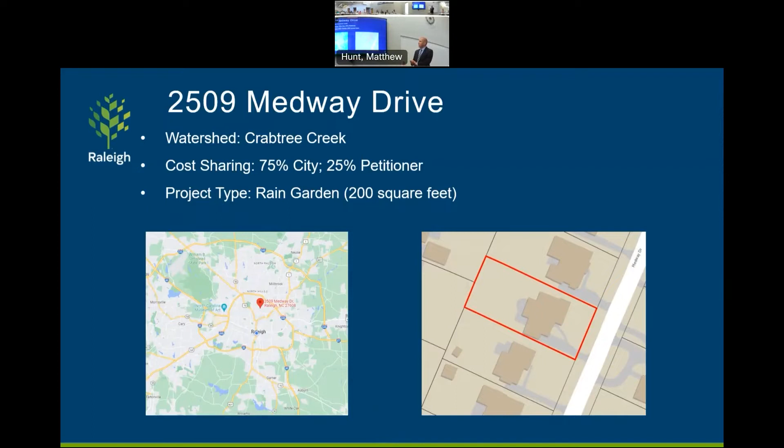The topography works out great. Everything kind of flows to the back corner. So pretty straightforward from a rain garden application.

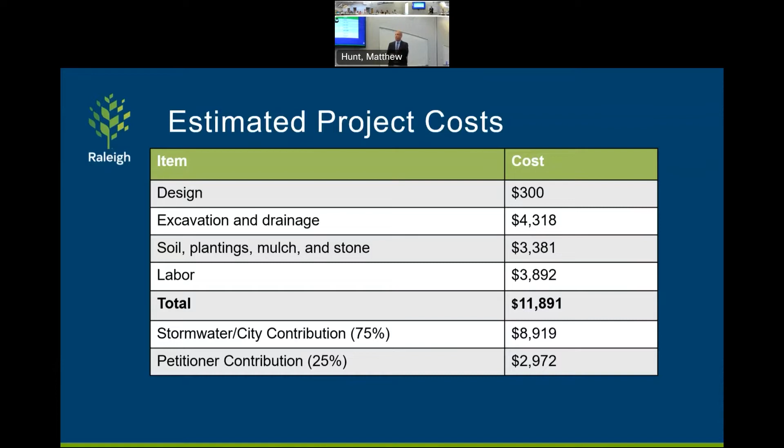See the breakdown in costs. Pretty general, pretty comparable to what we see on other rain gardens. We have a lot of data points from rain gardens - we've supported, I think, going on 90 of these over the last 12 years. As you'll see in the next slide, once we compare it to other rain gardens, it is spot on the mean, even with rising costs.

It's right on the mean for pollutant removal. Another slide shows the breakdown - total cost, the 75% that the city would be reimbursing, and then the applicant's portion that they would be obligated to pay.

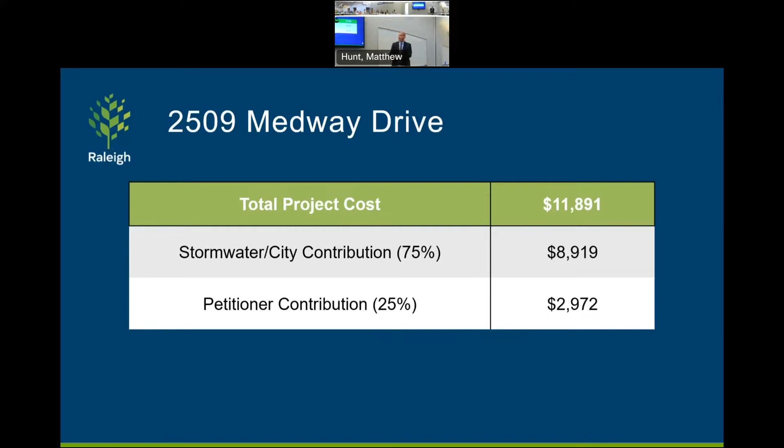This gets into the water quality considerations. The one thing we'll talk about a little bit in this one, but definitely in the next project, is the nitrogen removal cap. That was a recommendation from the commission last February 2021. It was a way to help not only compare different types of projects to the project being reviewed, but it also created a new acceptable cost for an approved project. In this case, the cap is $7,000 per pound of nitrogen removed.

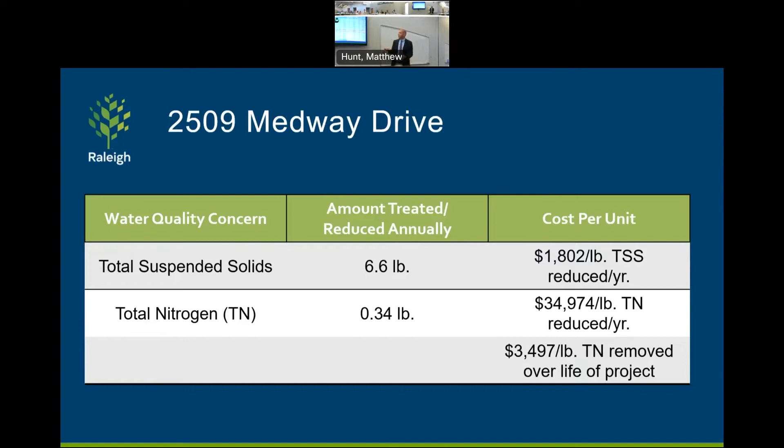This is showing this project is half of what the cap is. Just a kind of takeaway - this number is a function of total cost, the amount of impervious surface being treated, and the duration of the maintenance period. So what that really boils down to is a lot of impervious surface being treated, low cost, and a long maintenance period means a great metric. Those are the three things that combine. So this one, half the cap, comparable metric to other projects, as we'll see here - that's a truncated comparison against other rain garden projects.

It's dab in the middle. And you'll notice even for rain garden projects, which are usually slightly more cost effective than other project types, it's just slightly above the mean. So I just want to point that out. I wanted to walk through that nitrogen metric prior to moving on and see if y'all had any questions. I know we have some new members on the commission.

Is that the landowner decides whether it's a 5 or 10-year maintenance term? Good question. That is going to be based on how much they're being reimbursed. Per the policy updates in 2018, any request greater than $5,000 requires a 10-year maintenance period. Anything below that threshold is a 5-year maintenance period. So what you might have are projects right on the fence, maybe eligible for $5,100 in reimbursement. They'll voluntarily cap their reimbursement below that mark, have a shorter maintenance period, a streamlined process, and at the end of the day it's mutually beneficial for schedules and our goals. That is set per the policy, so anything the commission sees, generally speaking, will be a 10-year maintenance period. There is one or two exceptions, but not of value to go into detail with now.

Sure. Just a quick thing on the maintenance term - what happens if there is a home ownership change throughout that time? Is that linked to something in the contract? Very specific, but I was just interested. That's a good question, and we get that a lot. When me and Steven are standing in people's backyards, that's a question: what if I'm not living here in 5 years?

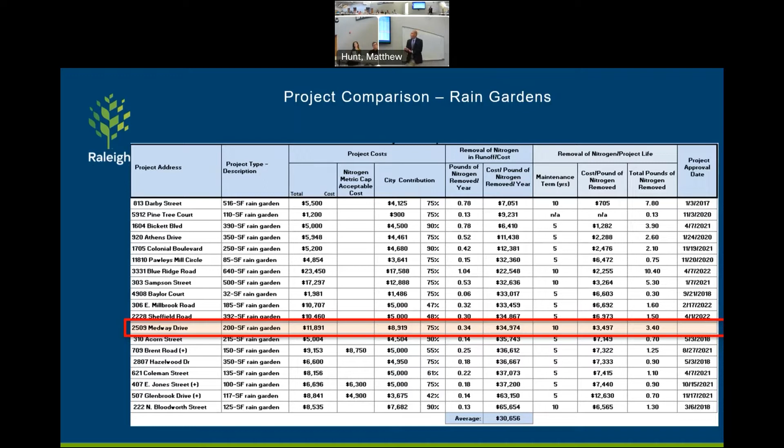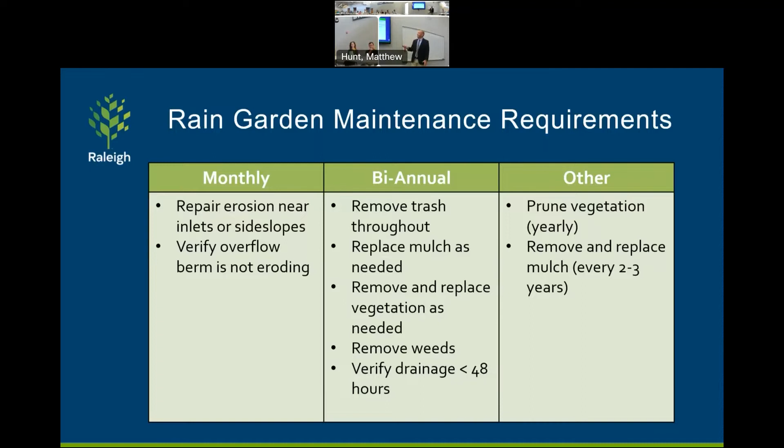All right, moving on, general maintenance rain garden, same slide y'all have seen if you were sitting in that chair since the beginning of presentations 90 times. So, any questions about this project?

Chair, would you like me to present each one? Yeah, all right, good. Put them together. All right, moving to the second one.

So this project is an underground cistern, and staff had two big concerns with this project when submitted. The first was the high metric - we just went into detail about that. It is a very high metric compared to all previously approved projects across all project types, and that's the first concern staff did share with the applicant. The second was the fact it's a difficult site - there's a tight backyard, and a lot of peripheral work will also need to be done, including a retaining wall to make this underground cistern fit in this footprint. So that was the feedback we provided back to the applicant.

They, in turn, made some small revisions to the application and then did their due diligence in an attempt to get multiple bids beyond the three. I'm presenting it as it's been submitted to staff, with the numbers that have been provided by the applicant.

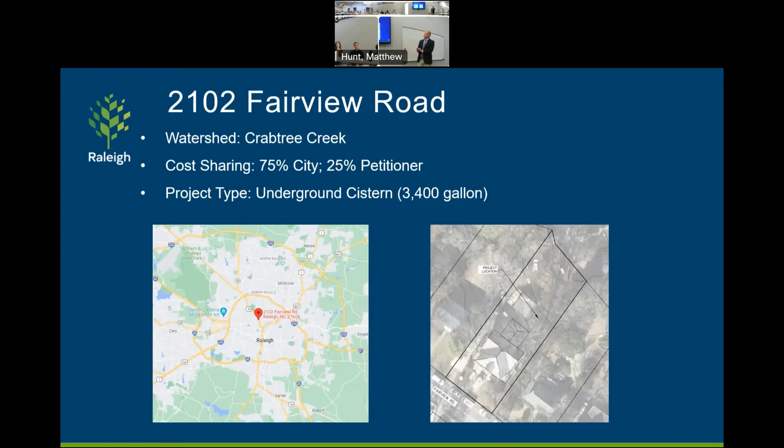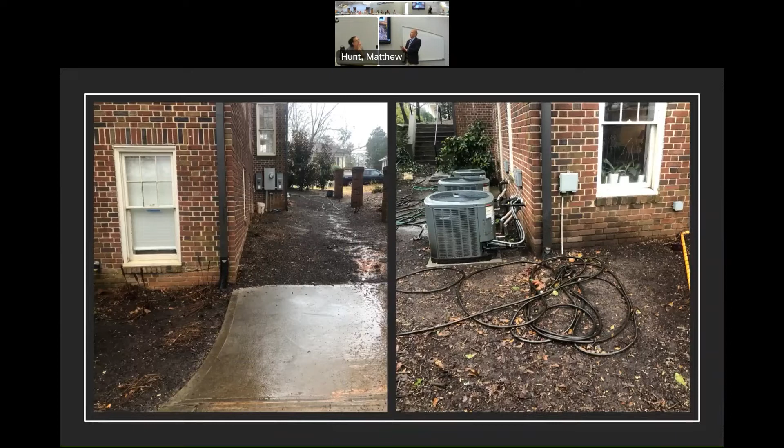I will say the designer has done well to mitigate a tough site to make a system work in the backyard. They're capturing all the runoff from their roof - rather large home - taking it along, burying it along the side of the house. Currently the downspouts are already buried, pointing back there, entering into a system as you can see over here. You can see they're coming down two inflow pipes into two separate systems that are connected with an equalizer pipe, and it has an overflow with a passive drawdown where the topography allows for that to discharge in the right rear corner of the lot, as you can see there.

I will say it's a very well thought out project with a lot of attention to detail on the design side.

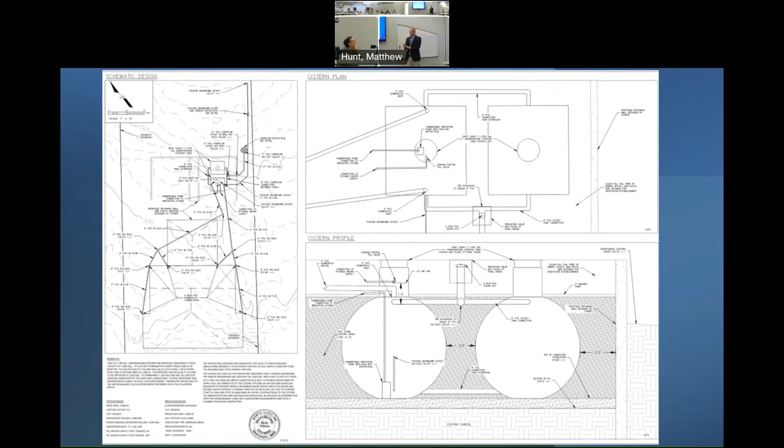Going on to the water quality metrics and considerations.

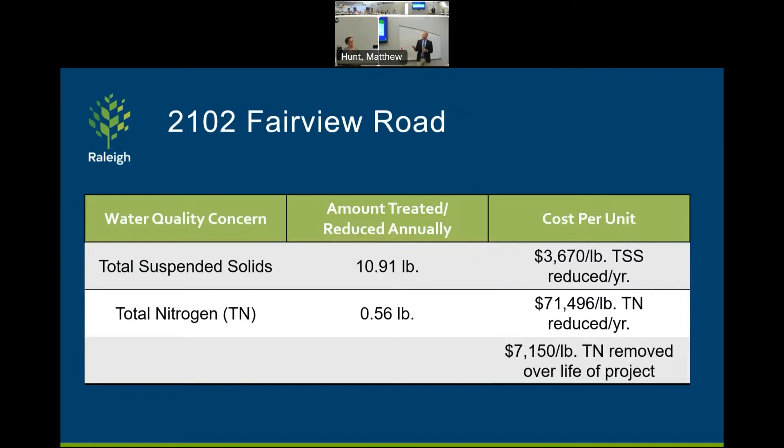As you'll see here, the cap was triggered on this one. The cap is once again $7,000 per pound of nitrogen removed. This is based on the applicant amount submitted, the total project cost submitted, which would trigger the cap. And so how that works is they submitted a total project cost of $40,000.

You work backwards from $7,000 per pound of nitrogen removed to develop a new project acceptable cost based on the cap, which is $39,200. And then the applicant is eligible for 75% reimbursement of that new acceptable cost.

And so after you go through that math exercise, and then you have your buddy check it, and then his buddy check it, you put it on the slide and show that it's not 75% anymore, it's 73%. And these numbers will add up to the total amount.

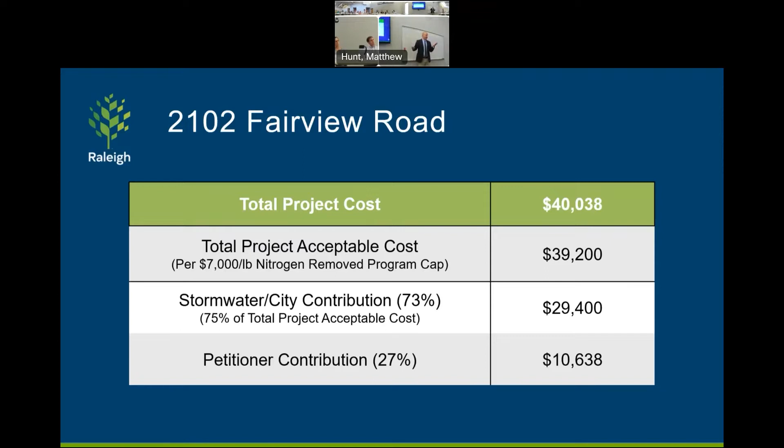So trying to see if there's parting words with the cap. The cap is triggered for high cost projects that do not treat a lot of impervious surface, or we find that it's also triggered on really small scale projects where there's a bottleneck where they can't get any cheaper on install, but they're not treating enough. So probably by design, it's catching both ends of that spectrum.

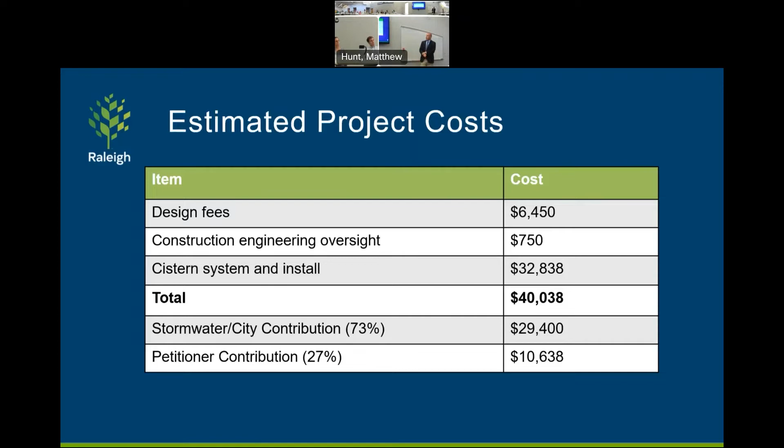Here is the breakdown in cost for this application. And you will see, as mentioned, it has a metric that is one of the highest the commission will have seen. For underground cisterns, this is just compared against underground cisterns. It's well above the average of underground systems and above that mean I was talking about across the program as you were reviewing the rain garden project.

Yes sir, are there rows below that? Not on this one. I only can use the truncated list, above ground cisterns and rain gardens. So it is the most. And even furthermore, if you were to pull off this long sheet and compare it against all the projects, there is, I believe, 1 or 2 green roof projects that might be higher, but there are no other projects on this sheet with a higher metric.

What's the maintenance requirement on that? Isn't that a little bit more intense? It is a little more intense. Our slide might simplify it, but it may involve a submersible pump. It may involve blowing out some piping that's not accessible underground. So they have a filtration setup, which is kind of a low maintenance choke point, so they can easily access their filtration box, for lack of a better word, at the inflow, and quickly get to that. But as long as that's maintained and their outlet pipes are maintained, it's not a whole lot different in maintenance. But yes, it is harder to get to, obviously, since it's underground. So very general, my answer is it would be more complex than an above ground system.

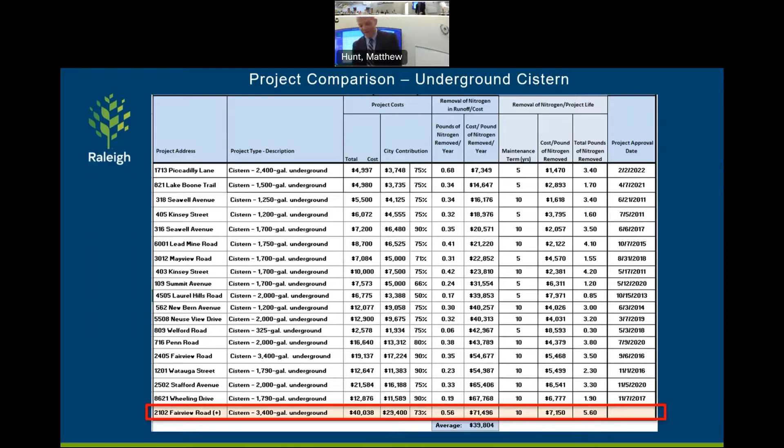With the proposed water quality volume, we require the water quality volume to capture the 1-inch rain event, and then the applicant can hold an equal amount on hand to use throughout the property. So the remaining gallons will be used for seasonal irrigation and landscaping.

Do you all do any sort of analysis to make sure they can actually use that amount? Well, like Mark was saying, it looked like a small lot and that's a lot of things. Yeah, very good point. The staff and the commission has struggled with that in the past.

How we've managed to move beyond that, and I think put it to rest, was the passive drawdown concept, where we're interested in the first inch of rain and want to provide a benefit to the applicant. We provide a cistern that'll handle 2 inches of rain, but we want that passive drawdown right in the middle, so they can't sit on that first inch and not use it all year. We always have that capacity recharging between rain events over 72 hours. At that point, it moved from more of an amenity to a water quality device that's mutually beneficial. That's generally speaking for cisterns.

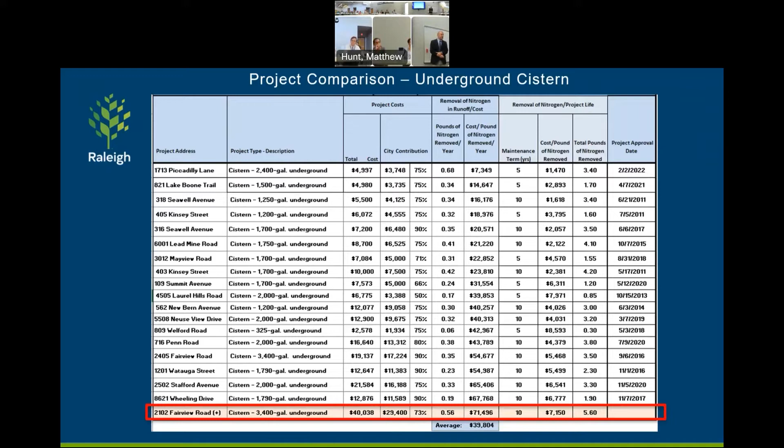So this is in a good spot, size-wise, for the property and the drainage that would collect in a 1-inch rain event. Is the size of the cistern appropriate? Oh yes, sir, the cistern is appropriately sized. It's a pretty large house. They are capturing over 3,000 square feet of runoff in a 1-inch rain event, so you get to what we would support, up to 2 times that size. So that side of it checks out, size-wise. That's the short answer.

Having experience as an underground cistern owner, you're gonna use up that water in the summer. You can burn it up pretty quickly. I'm not sure how big the yard is, but with winter you don't have to use much, so you're gonna have a lot of water they've gotta get rid of. Probably no use for it.

In your opinion, can you compare this to the other Fairview Road cistern that's the same size, that's almost $20,000 less? Is this new fancy design worth that extra money?

It's a valid question. I would maybe look at some of the dates. Some of them are older. That one was 2016. Trying to think of the 5508 Neuse View Drive one, that's relatively recent. Our standards really haven't changed, so it should be pretty comparable. I would argue the one factor we don't change is our standards, but what may change is the outside cost. I can't explain it other than what that math exercise generated and how it compares against other projects.

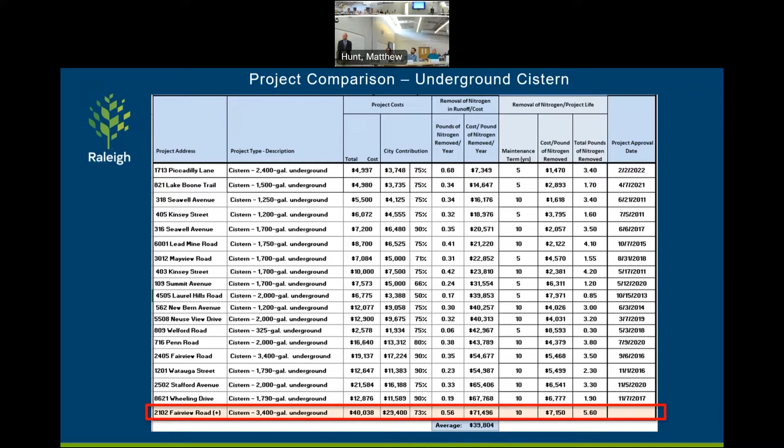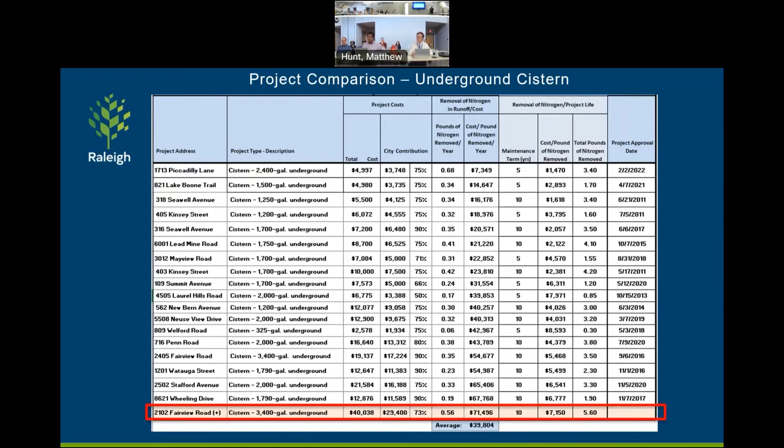All right, I will entertain a motion that we accept both proposals, the Medway and Fairview Road, as presented. Mark makes the motion, Earl seconds. All those in favor, raise your hand. Any opposition? Okay, one opposition. Motion passes.

That's Commissioner Calavera, just for the minutes, was in opposition. Do we normally delineate? Unless you wanted it for the record, Katie. I think we usually do. Okay, thank you all.

We did not receive the drainage assistance projects reviews in our information packet, so we did not have time to digest it. So I propose that we revisit this in September. With that being said, I had a question, without the package, but I wanted to first get reactions to that.

Also keeping in mind that we have representatives from Bramblewood Drive here just to be present to answer questions. I want to hear from the commissioners: do you agree with waiting until September when we get the packet and digest it, instead of seeing it for the first time here? Or can we see it for the first time here and proceed? I don't think it'd be appropriate to wait, but I've got one of the petitioners here. I would like to go ahead with the presentation, so any questions we can get to them too.

Okay, do you want to just skip Pool Road and go to Bramblewood? Let's do that, although I do have a question about Pool Road. I would say you have both of them lined up in order, Pool Road and the other. Just proceed with both presentations. My apologies to the commission, that was my oversight that the package wasn't in the material. So at this point, we'll receive the information, but we may not take action on it until we can deal with that.

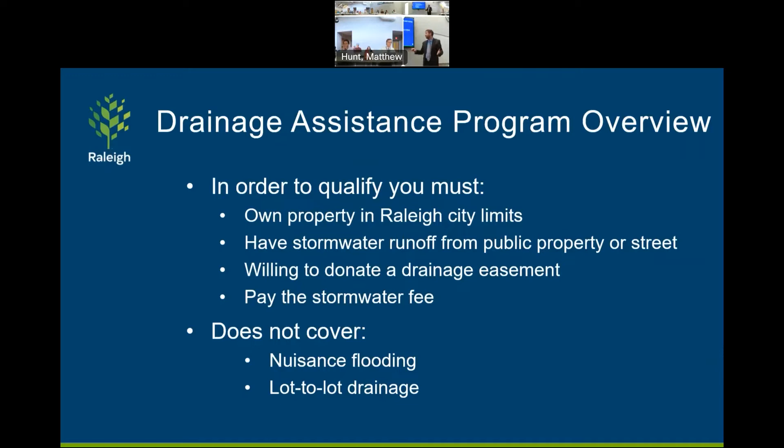We have $1.25 million in annual funding this fiscal year. That's what's allotted, not necessarily what gets spent in the fiscal year, as projects take time to design and construct before that money gets spent. These numbers I'll present are estimates. With that $1.25 million, we're anticipating about 8 projects per year. Keep in mind these are small projects, not larger CIP projects—they're generally smaller based projects with funding.

So the first project we'll talk about is Poole Road, a little bit east of downtown within the Beltline. Next we have Bramblewood Drive, a little bit north of the Beltline off of Freedom Road. This is actually a larger drainage systems project—we have 6 projects that are impacted by Poole Road.

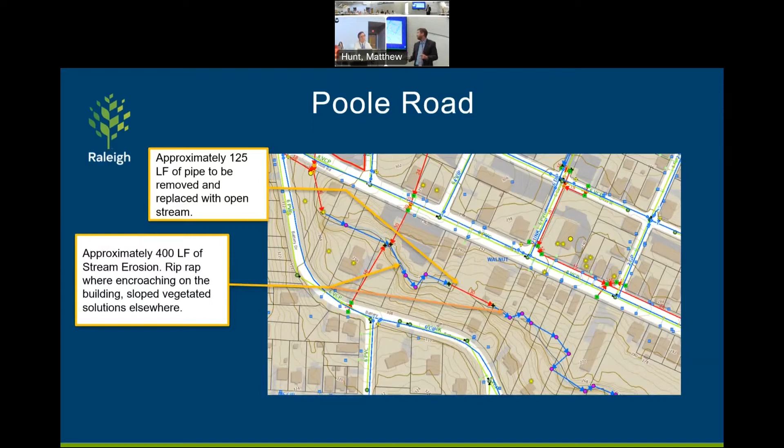One of the things I wanted to do is compare this project with another similar project. I picked the 1308 Poole Road, which is a little bit upstream, as I mentioned.

When we score these projects, there's about 50 different criteria that we rank, and we want to try and be as objective as possible. Within these 8 or 9 criteria, there are about 6 sub-criteria, so that's where you get about the 50 criteria that we go in and rank. Generally speaking, the numbers match, which is good. They're not going to be perfect or always 100% consistent across as many items as we do rank, but I was fairly encouraged by the scoring.

For the cost, we would do $30,000 for the engineering design cost, $200,000 for the construction, and a total project cost of $230,000. Yes, prices are going up, taking that into account, but also take into account that we'd like to partner bundle, as we put it, the design and construction with the Poole Road project, which was about 300 linear feet and cost $196,000. So you can see fairly comparable costs there.

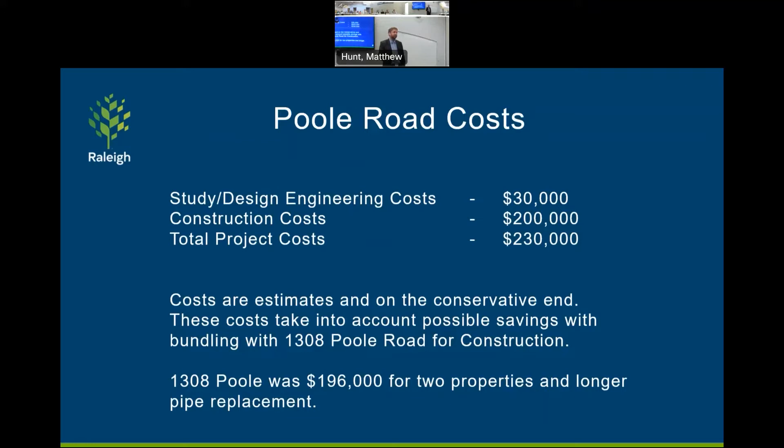That's tricky. So it's the 1308 project designed yet, or? It's in early design phases right now, so we would want to move that along. Again, not to pressure you guys, but just trying to. Maybe some economies of scale, yeah. Saving money since that's not implemented yet. Mobilization and stuff, that. You might go up a few slides, sorry, Chair.

Yeah, go. Yeah, I'm sorry, go back to the comparison. We're looking, you're saying 1504? Yeah, I mentioned one, I didn't want to stretch out all the addresses. Okay, because I had a question about the safety criticality score, which here is 50, but on one of your earlier slides it was listed as 90. So go back to the top. Right here. Apologize, I must have missed that. So which one is correct?

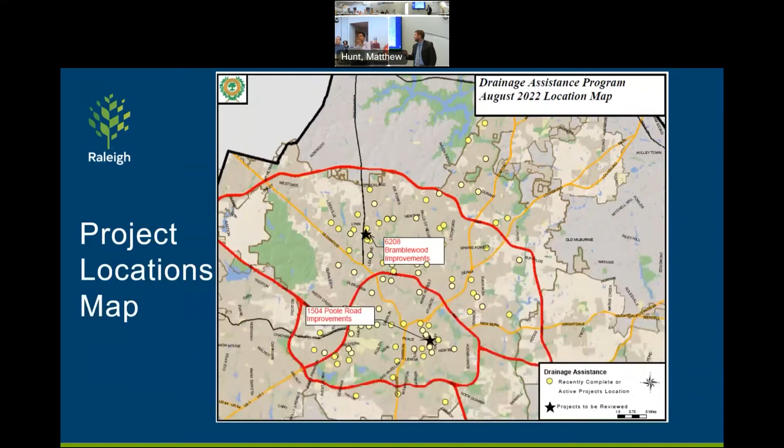It would probably be the 50 because of the length of the stream and the length of the impact, and that must have been an error on the Excel sheet.

So then my question is around safety. Not everything is hinged on safety, but if this is a 50 and there are several others that are higher, I guess why this one?

Well, because of the length of the project, not all the homes have erosion that's threatening the structure, but it would be good to go in and fix the whole thing rather than piecemeal it. For that one house, the safety score might be much higher, but if we were just looking at that, it's actually going to help solve part of the issue because downstream you have this pipe blockage.

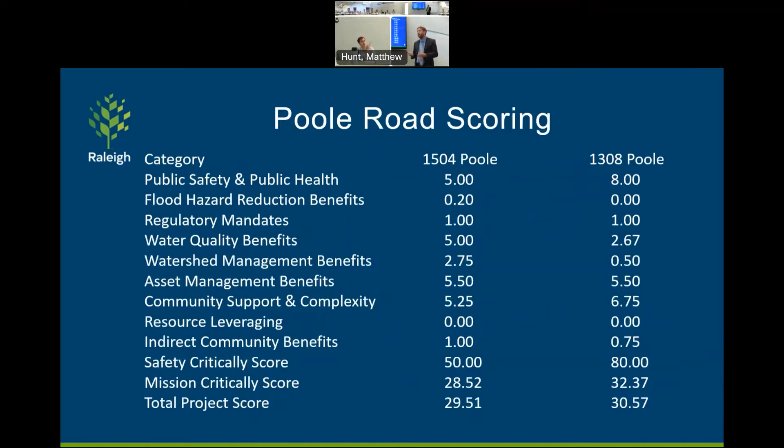I had the same questions you had, seeing the 90. So is there any chance that if you fix that 90, it'll bump this one down in prioritization? If we change that 50 to 90 in the Excel spreadsheet, it would bump it up actually, where it's listed as 90. Yes, it may bump it down.

Yeah, it'd be interesting to see where that would bring it in, right? It would be interesting to see it. Yeah, we can make sure we look at that. And the question I had even before you presented, this is close to Z5721,

which is the new proposed apartments a little bit north. I don't think that's the 1308 you mentioned here, is it? No. And that did not get a lot of community support, there's a lot of pushback there. So my question is, how does this project...

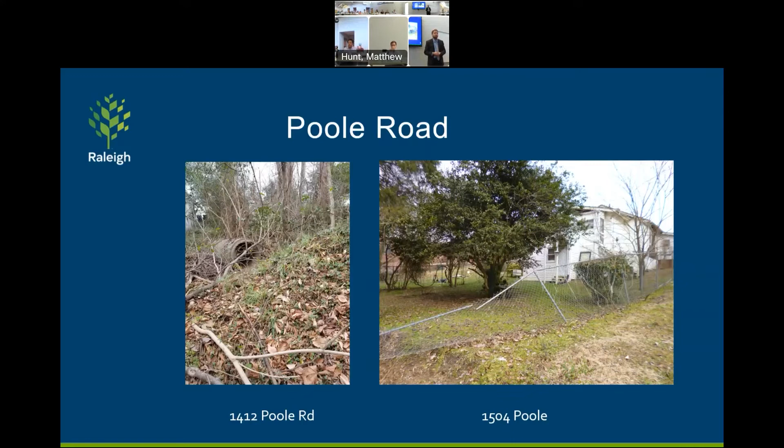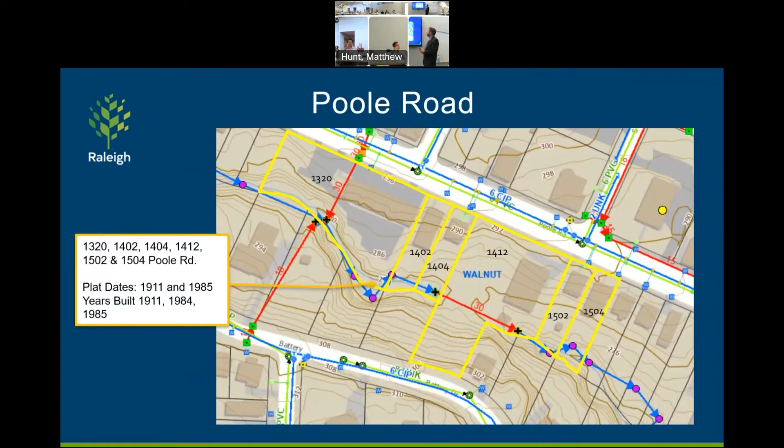How will this project be impacted by the larger project that's upstream? Not even upstream, but if you go to the map, it's close to the intersection - keep going up. I mean, yeah, it's too tight. Close to New Bern, and... it is right here, a little bit above there.

So I just wondered, with that being said, you have three with this project. How can we integrate? Because the rezone request said that there is some flooding that will happen because of this development. One thing we've heard is that a lot of these lots are exempt from stormwater regulations, since as single-family lots down to R10, they can go up to 65% impervious. That's a lot of impervious coming in. Residents have said over time it's gotten worse as development upstream continues to happen.

So when you come back in September, I'd certainly look at Z5721 and see the impact that will have. And for historical context, it's next to Battery Park, the Battery neighborhood, which was one of two neighborhoods - Rochester Heights, where my church is, and Battery - both rezoned in 1956 during segregation as places where Black people had to live. So even though these projects don't impact Battery specifically, they are proximate to it. Take that into account; it'll be helpful when we visit this in September. I'll make a note. Thank you.

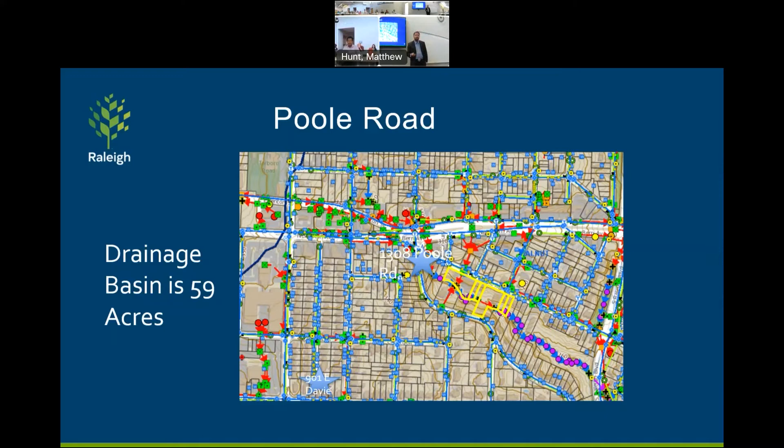So I would like to acknowledge that the property owners of 6204 Bramblewood are here. Sir, you're welcome to come up and speak.

Yes, sir, thanks for inviting us to come today. It's been a long time coming. What I decided to do, with just the few minutes I have, was make a few highlight notes. If you can put the drainage picture up there, that would be really helpful.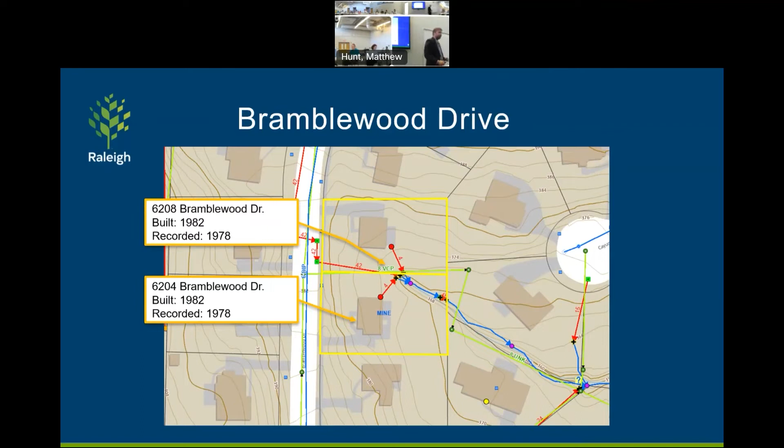I want to point out that it scored high not only because of the erosion encroachment into the residence, about 15 feet, but you can also see we have some sinkholes. We looked at the pipe, we videoed the pipe, there's a number of offsets. It's not something we can just go in and line, we would have to dig and replace it.

Understanding the concerns of the residents, but looking to extend the pipe a little bit, perhaps dissipate flow, while understanding the goals of our program as well. So that's something we have to take into account, that we need to go in and do what we can to stabilize the area while protecting the foundation of the structure.

I've noted that the pipe here is about 100 linear feet, to be removed and replaced because there's no way we could salvage that pipe. The offsets are like this, see, we're looking at the joints. Looking at the stream erosion, install riprap and stabilize where possible, perhaps add a little bit of pipe if we could. But again, that's something we want to look at with the reports, the geotechnical report as well as the engineer report.

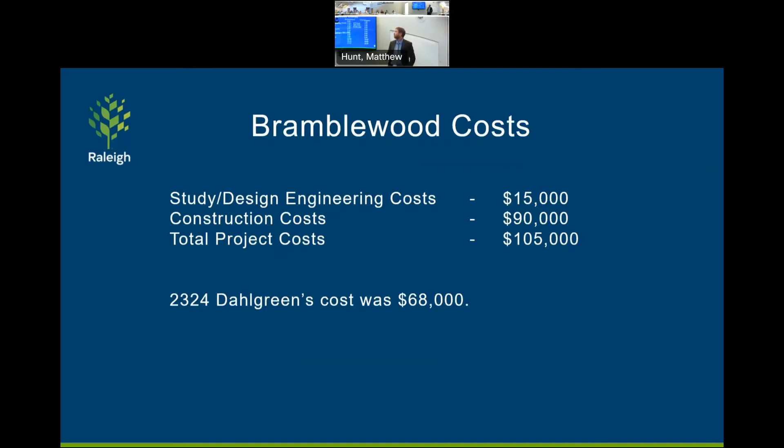Is this a regulated stream? This is a blue line stream. Yes. And the pipe you're going to remove, is it on their property? You say you're going to remove the pipe? So it's just on the property line, that's per iMAPS, but we would have to get a survey to figure out exactly where that is.

Yeah, the original plat, the drainage easement goes right down the property line, so. And a sanitary, they're all in it. So.

But it's within the city's drainage easement area, is that right? Yes. Is it an open easement or a private easement? It's a private easement. We don't have, remember, part of the criteria for this program is you have to donate the easements. And that easement would be transferred over, we would plat it around the infrastructure.

It sounds like you're going to use riprap, which they weren't very confident in, and I guess you're going to present this again later. Yes. It seems like the constraints you're dealing with is it's a blue line stream, a buffer stream, so you can't really extend that pipe because you're in jurisdictional waters. So you have to go to some sort of stabilization technique, it's a matter of what's adequate to withstand the forces coming out of there. But at the same time, they had a concern about who's going to maintain that. If it's drainage assistance, it becomes a public drainage easement, and the city's responsible for maintaining it after that, so it takes on their responsibility in making sure the design is adequate. Right.

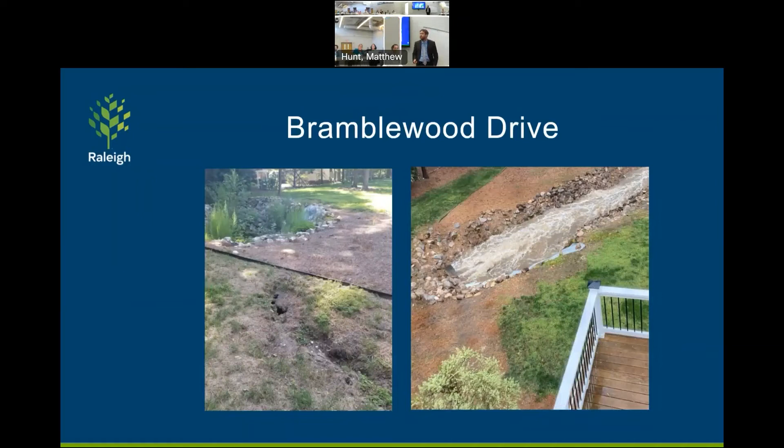Were any alternatives explored, like farther uphill, to address the water before it becomes such a huge problem? It's tough, that's a good question - good observation, slow the water down. We'd have to put in a detention system likely, but it's not worth it for the cost. We've had situations like that in the past where we've bought out properties and looked to put in some sort of detention system.

But, I can't tell the scale of the road - is there room on the road to do some green street treatment? It would be very difficult. You see there's a water line, there's a sewer line crossing, a lot of utility conflicts, there's probably gas in there too.

What does the downstream look like? Are you just going to push the erosion down to the neighbor? No, we would look to dissipate the flow, so we would not increase the erosion downstream. Okay, so their backyards are going to flood a little more. Remember, our key focus is making sure we stabilize the area and preserve the foundation.

Would you just - I mean if you're not working on stream - this all started on Primo Road, and all development on Primo Road is fully paved, so how would you just fit in the flow? I'm just trying to figure out - yeah, probably, that makes sense to replace the pipe because if that's not working. I understand it, we're just trying to figure out the next step.

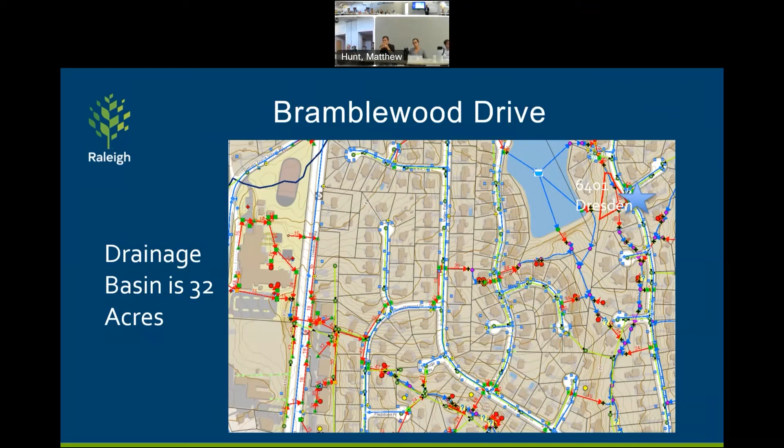Is that a 40 inch? It seems like it's a block. I don't know, it's 42. No, but there's some kind of thing that goes back into a pipe at the property line. Oh, I see what you're saying. Is that protecting the sewer manhole? But is that slowing something down that's creating more pollution on the property? Is that actually acting as a dam or an obstruction - trying to figure that out. As you said, it flows around.

So you could have one of the drainage pipes go around it - you can have one around it. Yeah, right, okay, that's...

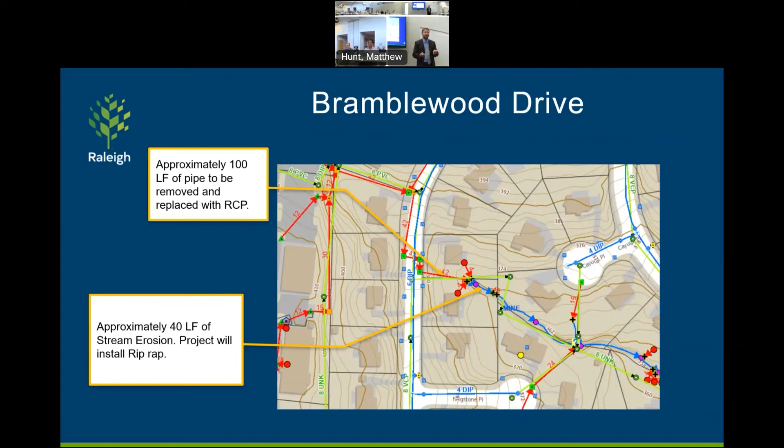Sounds like we have our work cut out. Yeah, good luck. But next meeting - yeah, we'll bring this back. Yes, yeah, all right, thank you. We'll see you, Chaz. We'll see you in about 2 minutes. That's right, we'll see you. All right, thank you.

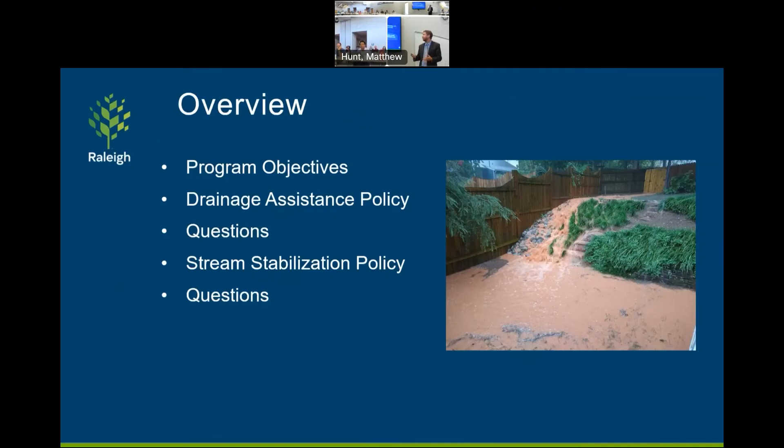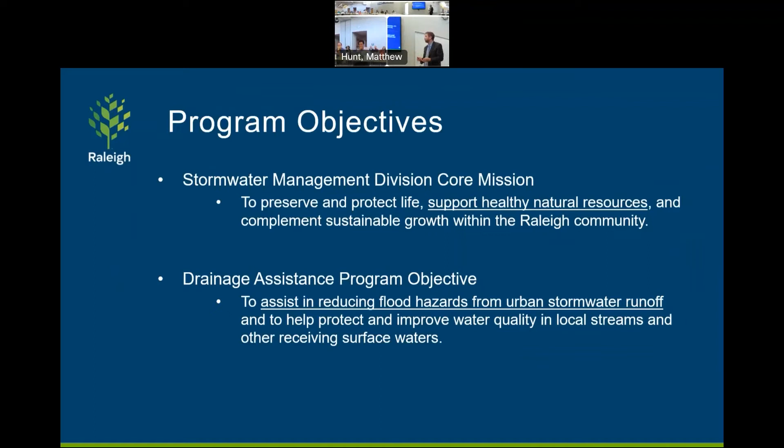I'll briefly run through this since you've seen it already: our stormwater management core mission is to preserve and protect life, support healthy natural resources, and complement sustainable growth in the Raleigh community. The drainage assistance program supports that by helping reduce flood hazard from urban stormwater runoff and protecting and improving water quality in local streams and other receiving waters. The existing drainage assistance policy was approved by SMAC and council in 2016, to assist private property owners facing flooding or severe erosion issues from waters that receive and convey public runoff. These projects are typically small scale compared to other stormwater CIP projects.

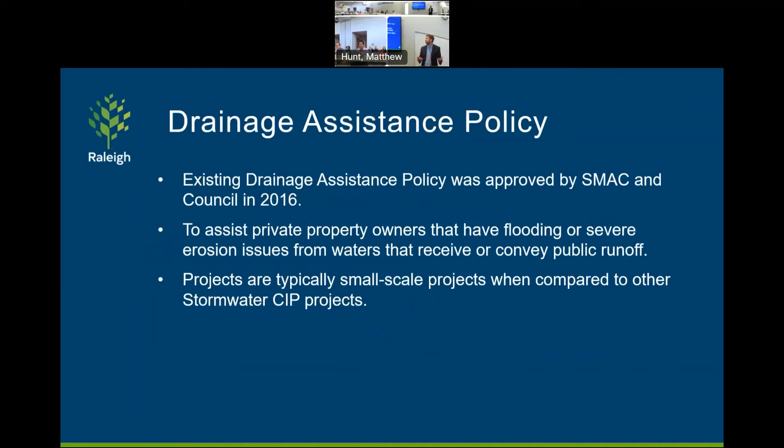So a majority of the policy from the current proposed policy remains unchanged. Most of the sections do include changes though, and we will start with section 2.

The previous policy included 4 definitions. We've added 7 definitions now for a total of 11: permanent drainage easement, temporary construction easement, rights of entry, riparian buffer, intermittent stream, perennial stream, and conservation easement. The definitions that remain the same were severe erosion, structural flooding, street flooding, and the city. Adding those definitions helps add a little bit of clarity as it defines more elements within the policy.

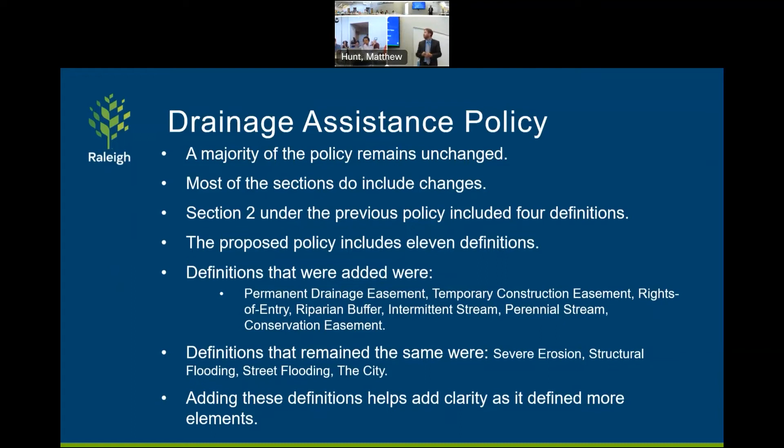One of the things I wanted to point out that has happened in section 3 is we've had situations where people have come in and requested assistance, and there's no impervious surface on that property. You may recall you have to pay a stormwater fee to be eligible for the drainage systems program. And if you don't have any impervious, 400 square feet, then you're not paying a stormwater fee, and therefore you're technically not eligible. So we wanted to find some sort of balance where if you have an HOA lot...

That is commonly an HOA lot, and if that is one of the properties in question, no more than 10% of those properties that contribute to that lot can be in arrears of their stormwater fee. The reason for that was, if you had 30 lots, you're always gonna have that one that doesn't pay. So we felt like 10% was a good number. This change will allow properties in certain situations without impervious to be eligible. What hasn't changed is the project must receive and convey public runoff and be within city limits of Raleigh. That we want to absolutely keep the same.

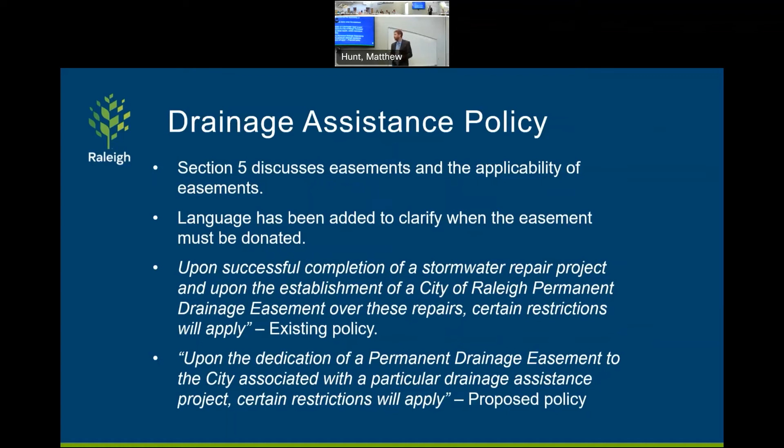In section 5 of the policy, we've changed the language to match that of the Unified Development Ordinance. Under the current policy, certain encroachments like fences or structures would have to go to the stormwater manager for approval. So say you wanted to put a fence in a drainage easement that was part of a drainage systems project—it would go through the stormwater manager.

Now say Joe wants to put in a fence on his private property up near Falls of Neuse, and he's got a private drainage easement—well, that has to go through engineering services. So we wanted to change that language to make it consistent.

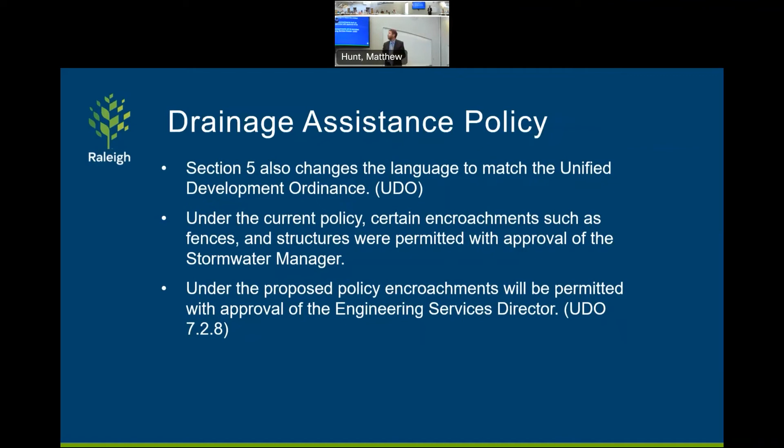So I'll pause for any questions. Do you want to go back to the first—I think it's section 3. Sure, so I think that's towards the beginning.

Yeah, all right, I think maybe it was the very first one that you had touched on. Okay. Oh yeah, so it's not the HOA.

So if the home is not in an HOA and doesn't have any impervious surface, are there cases like that? We're kind of branching out to include, and there's just some way to tackle that lack of imperviousness. Are there any kind of expansions for homes that are not in an HOA? Oh, so if there's anything else in there, are there any gaps that we're missing, I guess, because this was just with an HOA? Are there any other gaps that we're missing that are excluded, or scenarios like that?

I mean, I guess technically there are some common lots that by legal definition are HOA. I would go. Okay, but remember, when I was initially going through that, I was seeing those kind of gaps. Is this like a common area of the HOA, of the property that doesn't have any impervious? Yeah, like, I'll use one of the examples we looked at, that it's just a common area that residents can go to enjoy, a screening, lake, what have you.

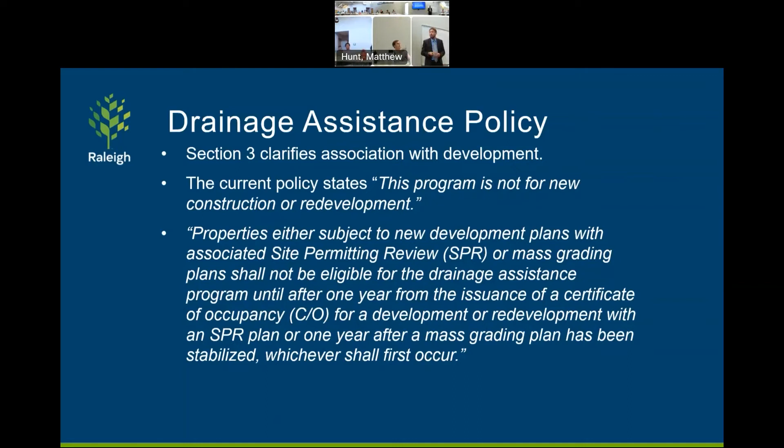I have a separate question, I want to go back to the HOA thing. I assume that the fact that someone is in arrears is not public record. So is it spelled out anywhere that the HOA can't figure out what 10% of people are in arrears? I picture an HOA bullying people into paying their stormwater fee so that they can qualify. Is there anything that protects people's privacy that they're in arrears? I'm not sure about the billing aspect, I know that everything we do is essentially public record, but understanding the privacy of people, I wouldn't want someone to be in a situation where they're bullied, but I do understand that it's valid.

Looking through this earlier, I saw there's some language about drainage system projects having to meet city standards. I'm wondering if that could be problematic, painting ourselves in the corner where we might be able to build something that, for example, carries a 10-year storm, and for design reasons achieving that is difficult. Or we might be able to put in something that handles a 5-year storm or an 8-year storm and improves the situation. Do we want to pin ourselves into that it has to meet current city standards?

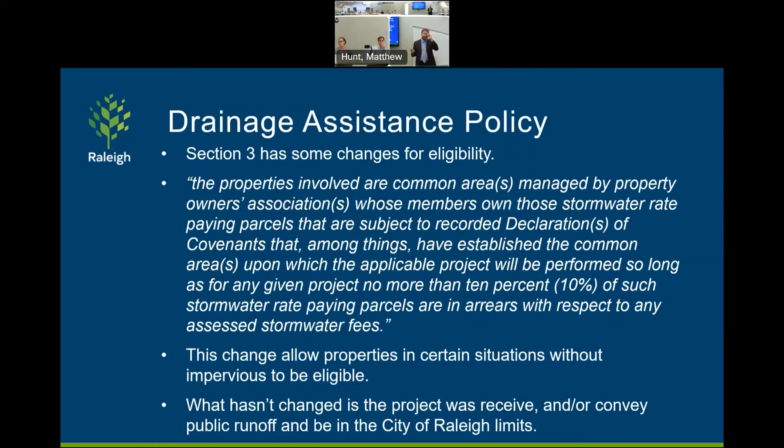Anything else? Check. We have the stream stabilization. I thought Ben... okay, you're right. So, I understand we're taking a little time here.

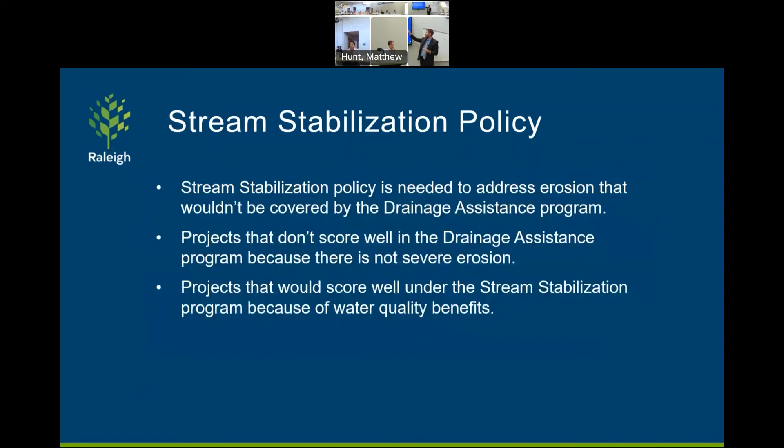Stream stabilization program objective. Now this is for the new policy. You've seen this. The stream stabilization policy is needed to address erosion. I'm going to go through and point out why we need this, because we've had projects that wouldn't score well under DA but could score well under stream stabilization.

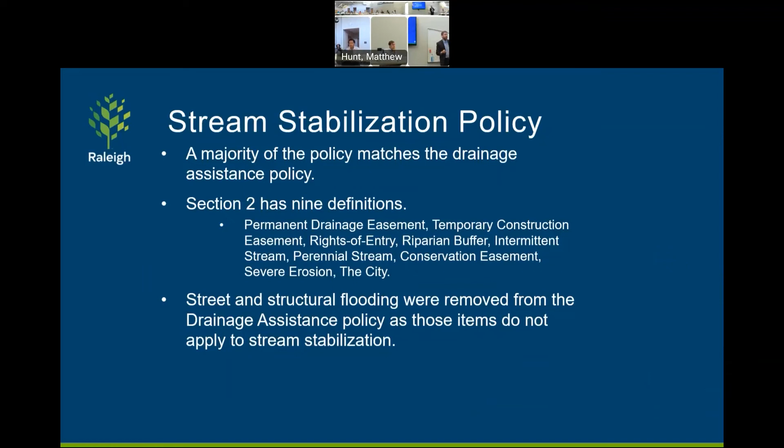The definitions are generally the same. We took out street flooding and structural flooding because those wouldn't be applicable to stream stabilization. HOA, same thing—same idea. We'll look at privacy and all that.

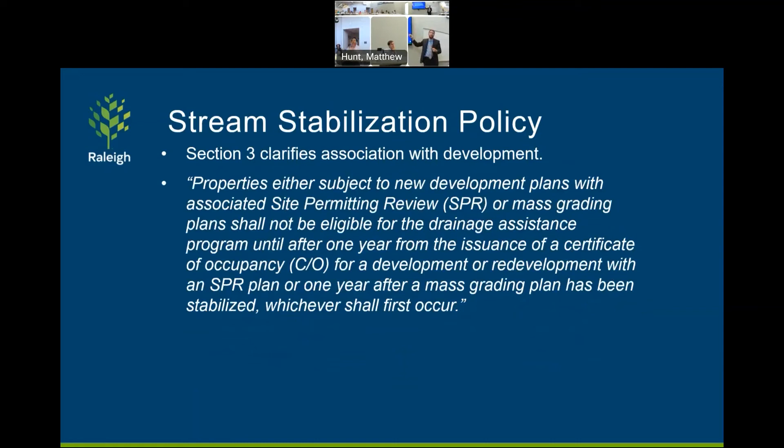We want to establish a minimum 20-foot streamside riparian buffer, which will be in a conservation easement. We've had some back and forth in previous MAC meetings about the buffer width and buffer length. And again, the same idea about the association with development or redevelopment—that language is very similar.

Section 4 now uses the same language as drainage assistance—participation in a stream stabilization project by the city, to which city funds are available. And again, we'll look at that as well. Section 5 discusses the applicability—again, very similar. We added language for the conservation easements and changed the language to match that of the unified development ordinance.

Is this to address more places like the HOA where there's less impervious surface going on, or is it to address city property projects? I'm just trying to understand it a little more. Yeah, it could be used for city park property, where you don't have a whole lot of permanent sewer structures in the area. Okay, or one of the things we're looking at too is partnering with Raleigh Water and trying to find areas because a lot of sewers are near creeks and they're becoming more exposed.

So that'd be a bit. Two comments, one the same thing about meeting city standards and design, there's a little room there. And also this one has some language about, go back to slide, talking about easements, utility easements.

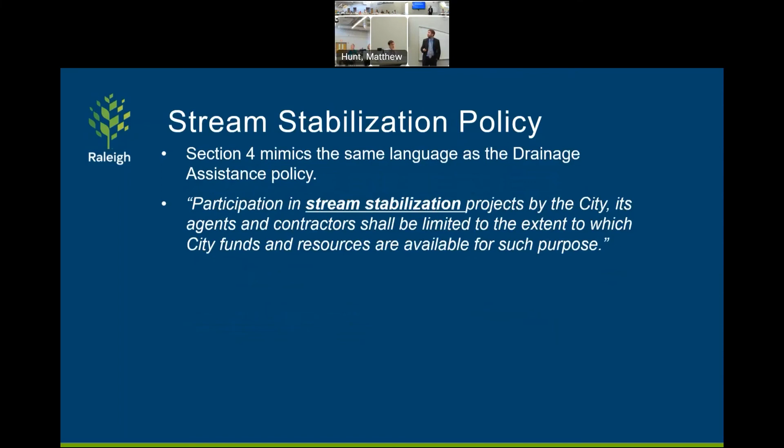Stream side area buffer shall not be subject to utility easements. I'm not sure what that means. Over the years, I know we've run into situations where either there was already a sewer easement there, or potential for where a sewer line had to go because there was no room anywhere else to put it. It has to follow a grade situation. So again, I don't want us to paint ourselves into a corner where we might have a good project, but because it may be subject to utilities, we can't do it.

But yeah, just be careful with your conservation easement language. That's the issue we've run across with Raleigh Water and Crabtree Creek, where they just replaced the sewer line, which runs parallel to the creek, and have erosion problems and buffer overlap hesitancy to put a riparian buffer easement in the sewer line footprint, essentially, or a future footprint. So just be careful about that conservation. Thank you.

Anything else? Yeah, 30 foot, I think so. Stream side, too. Yeah, where's the 20 foot? I don't want to rehash stuff, but that's a good question, because 30 foot being the zone one.

We've thought about that, but not everybody has the ability to give 30 feet. So that was a number we've gone back and forth on. But if we're repairing a stream, it's a blue line stream, and it would have, would it not?

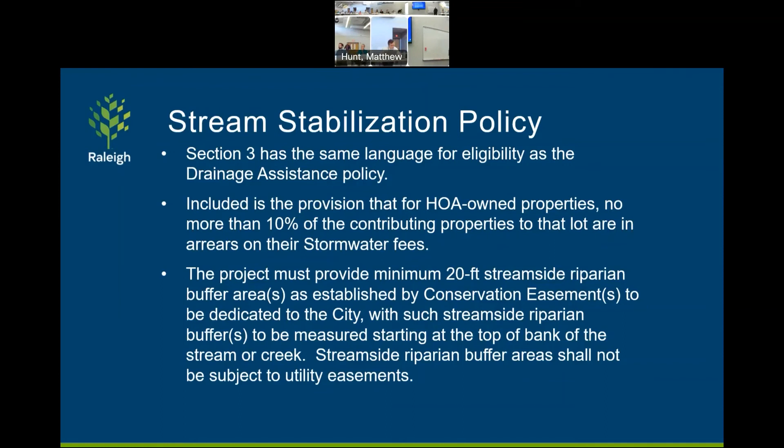You're gonna become an environmental attorney? I think over the years I had to get stuff from utilities.

All right, thank you. This is just an update, basically, to a couple items. One item, the Neuse ordinance changes you guys actually voted on in January, but the state has kind of pushed back our timeline on that, so I want to give you guys an update on where that is. For new members, we would go through those changes as quickly as possible. And then also an update to the stormwater design manual updated timeline as well.

Like I said, you guys saw this in January. The state updated their Neuse model ordinance for all the communities in the Neuse River Basin that are adhering to the nutrient standards, and it replaces the 1999 edition, which is good, 22 years old, is probably a little old for a model ordinance. So they did approve that in spring of 2021, and it was based on the enabling law for the Neuse rules, and it's going to apply to all the communities within the Neuse River Basin to adopt, and that's kind of the timeline we're on now.

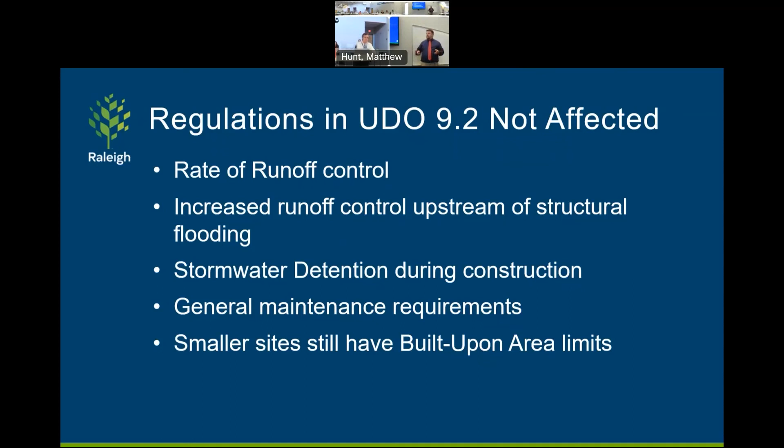We did add some definitions to the stormwater section that we probably needed. The new state term for impervious area is built upon area, which maybe I didn't do a good enough job of explaining back in January, but welcome to the world of BUA instead of impervious area. That's the term they're going with moving forward.

They also added some exemptions for smaller developments on large single family lots. If you have a single family lot over an acre, but you're only doing a very small footprint of 5% or less, you'd be exempt from even our maximum impervious area. The number of times we've seen that is close to zero a year, so I don't think we'll catch a lot with that one. Curiously, the exemption states that if you're more than 5%, you'll be subject to the standard stormwater rules, not just our maximum impervious areas, and that may catch a few people.

They also added exemption language for agriculture that was not in our UDO, which we sort of did as well. But there are major changes to how nutrients are treated, how that's calculated, and how that moves forward. Basically, the nitrogen loading rate leaving a site is still going to be 3.6 pounds per acre per year, and that's been the same since 1999 when the Neuse rules were first changed.

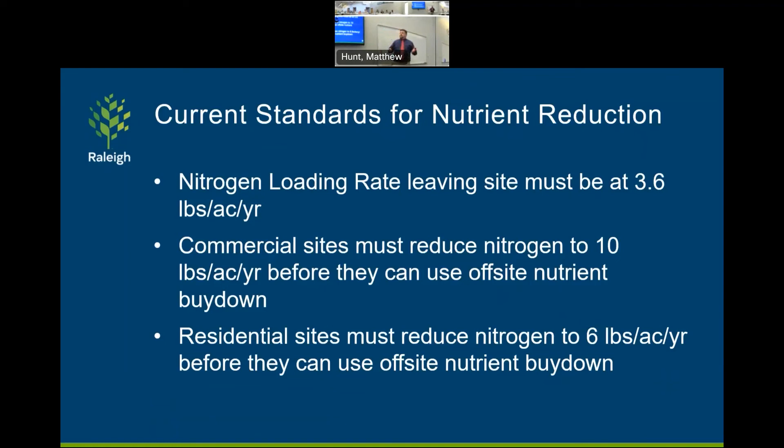That 3.6 is the target for the entire basin. Currently, commercial sites can reduce their loading rate to 10 pounds per acre per year with on-site controls and then buy down with offsite mitigation credits from there. Residential sites need to reduce to 6 pounds per acre per year, and then they can use some offsite mitigation credits to get to 3.6. Well, that's sort of going away with the new ordinance.

Same target loading rate at the end, but if you're more than 20% built upon area, or BUA, you'll have to have a primary stormwater control measure on site to even utilize any sort of offsite mitigation buyout. So we do get some sites that are less dense, around the 40% area, that can comply with buy down only depending on if you're in commercial areas or not, but that threshold is going to go up.

Because what that 20% translates to, and one of my plan reviewers figured this out for me this week, is about that 6 pounds per acre per year number. So essentially, if you're above that 6 pounds per acre per year number, to compare it to the old standard, then you'll have to put some sort of stormwater control device in, and you won't be able to just use offsite mitigation credits or pipe. That's what it's referring to.

The other big change, which is gonna affect staff and applicants, is that all sites must use a state-approved calculation tool, which is currently being used in our watersheds. It's called the SNAP tool. I don't know what SNAP stands for... Stormwater Nitrogen and Phosphorus tool. Oh, there you go. Perfect, thank you.

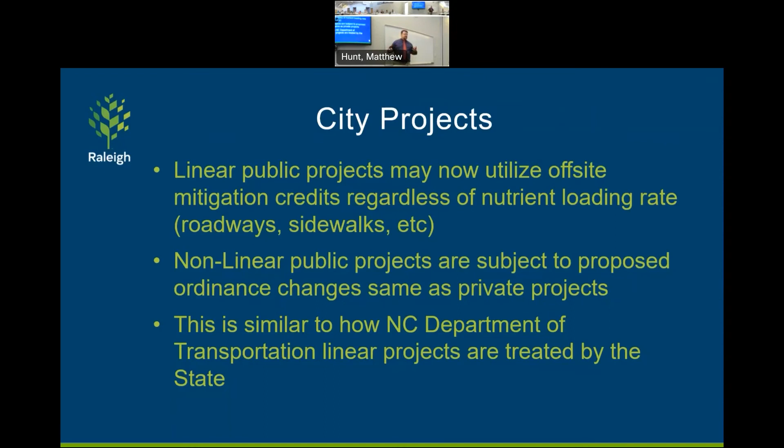A possible issue is that the new version of the stormwater nitrogen and phosphorus tool is not quite ready. We've been told it will be ready around October of 2022. Depending on how the EMC meeting went in July, I was hoping to speak to the EMC about the fact that it was not ready, and I'm worried about going effective 6 months after July if the tool isn't ready, but that got pushed back, so we'll see how that goes.

So we will have to get staff and our private applicants trained with that tool. If we have that March deadline to go effective, we'd have from October to March to get staff and the design community trained up. I'm hoping to lean on some state resources for that, but if not, we'll have to do our own outreach and figure it out.

Our plan review supervisor, Shai Hoyt, is actually on the committee going through the changes to the SNAP tool, so that's pretty good news. We kind of have some insider knowledge there.

The SNAP tool's results and inputs are a lot more detailed. Currently, if you've done any projects in Raleigh, we literally just have impervious, landscaped open space, and unmanaged open space. Well, there'll be a whole bunch of new categories now for impervious area—different designations for roofs, sidewalks, roads, and also for some of the landscape depending on what you're using it for.

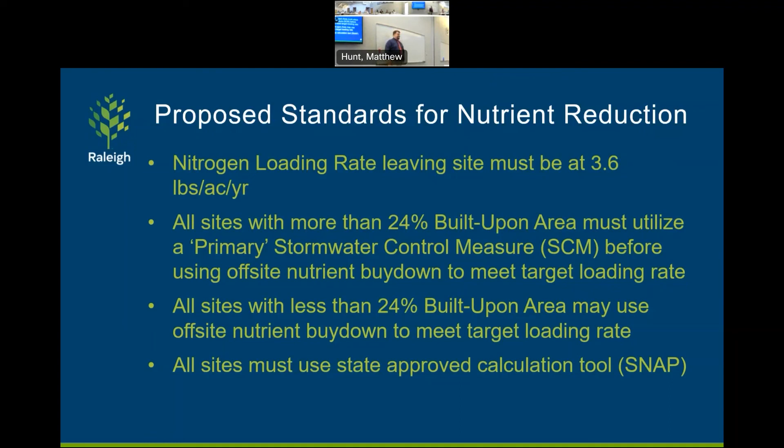So I think I'm somewhat new to this, but in the last year we've gotten floodplain regulations, we've got a stormwater design manual coming out mid next year, and then this process, the state has also handed down rules which we have to comply with. So there are three big movements in your world over the last few years, right, besides all the statute stuff like tiny houses and cottage courts, which is a whole different area.

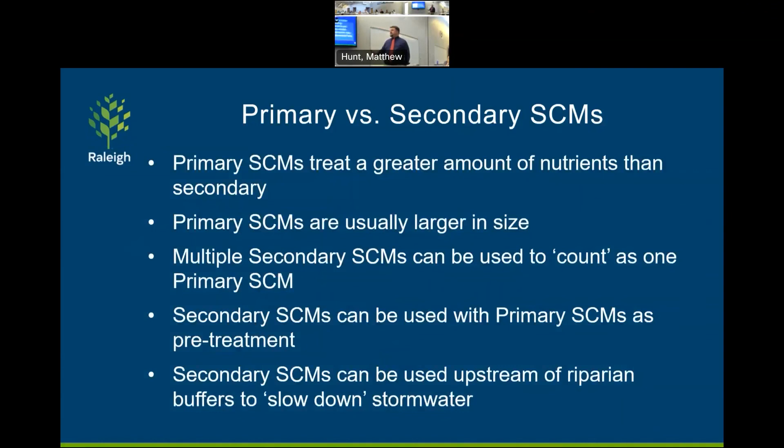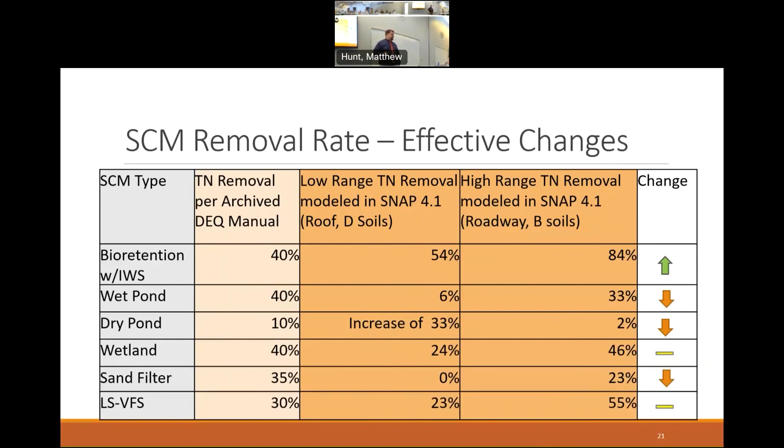Is this going to increase your workload significantly? I mean, I would say significantly, we're going to have to get better at SNAP where we are now. Me specifically, I'm going to have to be better at SNAP than I am now, because I've tried to avoid it as much as I could. Does it make the review process, though, a little more streamlined, since there's one tool? Yeah, it's going to be a little better from that.

The one thing we want to get a handle on with the tool is that, because it's a spreadsheet, at the end of the day it's in the SNAP tool, the Excel spreadsheet. So we just want to figure out what we're going to need from the development community. Off the top of my head, we need their raw spreadsheet, but also a PDF summary of the results. But do we need more than that? Part of the reporting is that the state currently wants all the SNAP results with our annual reporting, so we're going to have to find a way to catalog and save that stuff too. That's going to be a little work.

I'd be interested to know if you're going to go through and check people's Excel spreadsheets, like, is there some way, I don't know how it's locked. When you're dealing with people that use spreadsheets all the time, like these designers usually do, you have to make sure they're not hacking into the spreadsheet and changing it.

Who's been your contact at DEQ with this? Trish is your contact? Yeah, and she's actually the author of this. She's going to get a lot of questions. She already gets a lot of questions, but she's over this model update too, so it's not separate, which is nice, it's the same person in charge of the model update most of the time.